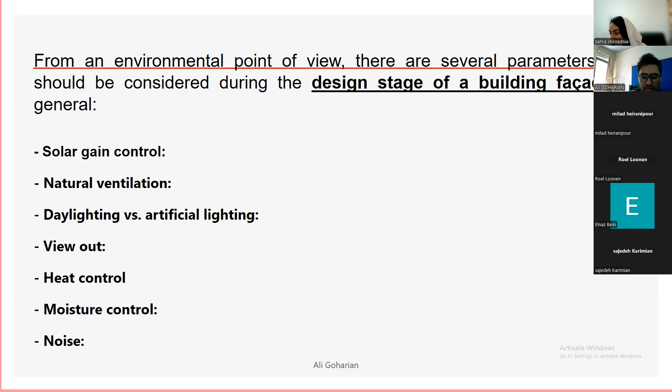Many studies have been conducted in the field of energy efficiency related to dynamic shading, dynamic facades, and shading facades. And there is a bad thing, I think, here. If you want to study adaptive facades, the terminology and classification, because of the many studies in this field, is confusing. For example, we have a lot of different kinds of adaptive facades, such as active facade, passive facade, biomimetic facade, kinetic facade, intelligent, interactive, movable, responsive, smart, and switchable.

However, Amir Tabadkani and other colleagues tried to classify and categorize the different kinds of adaptive facade in terms of typology, but I think there is ambiguity and it's very vague, and you have to avoid getting stuck on terminology and classification. According to studies, they are important if you want to do the research, but it's very confusing, and it's very obvious for any professionals.

First of all, I want to separate adaptive facade into two major parts. Actually, we have two classes: the conventional class and the non-conventional class. Recognizing the non-conventional class is a little bit hard and sophisticated, but if you know the conventional class, you can distinguish the other types of adaptive facade. For example, louver shades, Venetian blinds and roller shades are included in the conventional class, and the others are included in the non-conventional class.

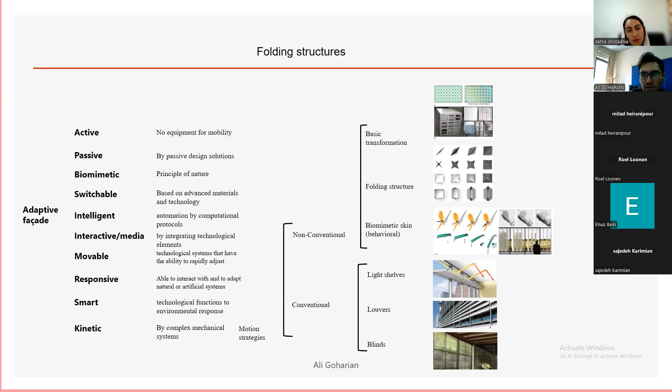For example, we have active facade or passive facade. Double skin facade is a kind of dynamic adaptive facade. However, there is no object that moves physically, and everything is fixed. But actually, it's a kind of adaptive facade.

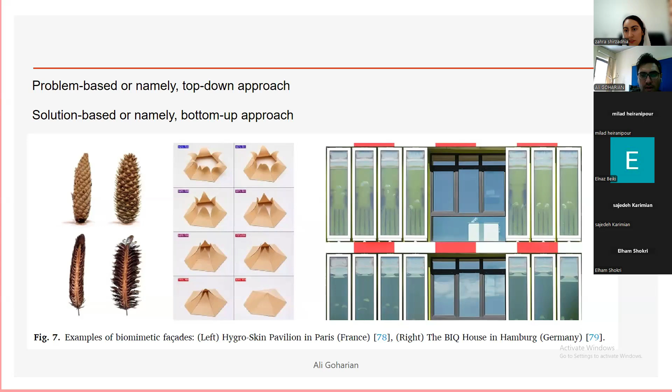And the biomimetic approach in adaptive facade is very recommended, I think, because it's very popular in material science. For example, the BIQ house in Germany has been conducted with algae to reduce and control the risk of glare and excessive incident radiation into a space. This type is very popular, especially in research.

And this is a kinetic facade. A good example of kinetic facade is Al Bahar Tower, and also the Arab World Institute in Paris is one of the most famous kinetic adaptive facades. Usually kinetic adaptive facade considers the indoor environment and tries to control indoor conditions in terms of thermal comfort, visual comfort, and reducing cooling load. Most of the time it is used for dry and hot areas.

Intelligent facade is responsible for initial functions, and we also have smart facade, such as phase change material and thermo bimetal as shape memory, and these are very popular, I think, in research. However, in terms of cost, it is very expensive, and it is not available everywhere. I remember I tried to prepare some materials in the field of thermo bimetal as a shape memory, but I failed, because it was not available in Iran, especially from abroad. I know this is very expensive.

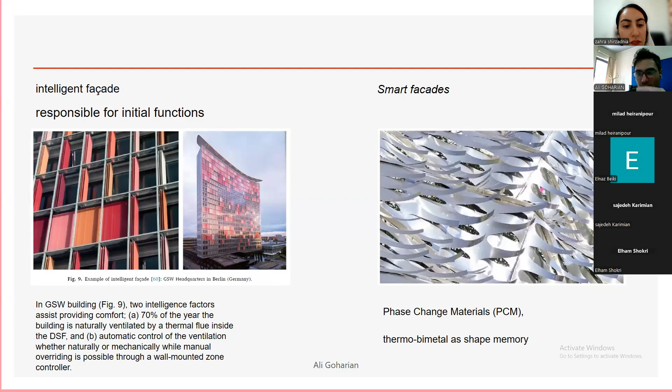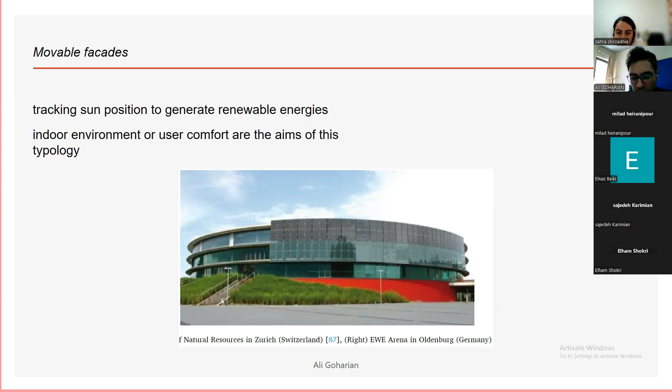Interactive or media facade is mostly used for aesthetic issues, and this is not our focus in this workshop. Movable facade usually tries to trace the sun position to generate renewable energy, and most of the time it disregards the indoor situation, because it focuses on gaining solar radiation to generate as much electricity as possible.

In terms of motion strategy, we have three major parts. First, basic transformation, which is very conventional and common for non-conventional adaptive facade in terms of motion strategy. A more advanced motion strategy is folding structure. As you can see, it is used for Al-Bahar Tower. It's a little bit sophisticated in terms of motion strategy and movement mechanism.

Biomimetic skin is also one of the motion strategies. According to the research, biomimetic skin is very popular, because much research has been conducted in this field, since it's one of the main interdisciplinary studies for dynamic adaptive facade and shading, because of the movement you can find in nature.

However, in terms of physical characteristics, the kinetic adaptive facade is one of the most multidisciplinary topics in the field of mechatronics. Our focus in this workshop does not include the elements of kinetic facade, because it is a little bit complicated. For example, the sensor of an adaptive facade gains the data, then sends the data to the processor, and then the processor commands the actuator to perform the physical action.

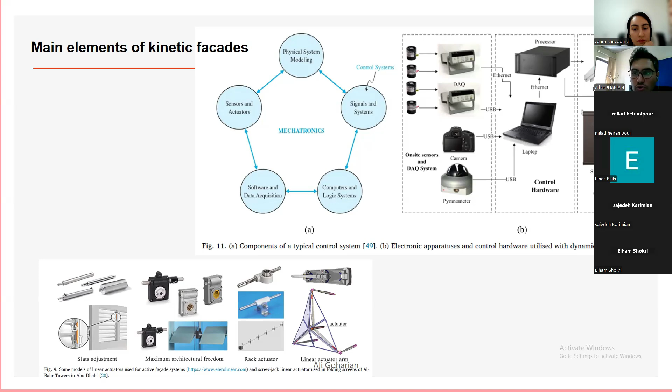And actually EMS is only for conventional adaptive facades, and you cannot use it for non-conventional facades. However, some studies have been conducted in this field, but they are a little bit sophisticated, and they try to use some coding or additional plugins to link some software to each other.

And regarding performance assessment of adaptive facades, the most important assessments are thermal comfort, daylight level, glare, view out, reducing lighting, and energy load. And there are three major approaches to the dynamic adaptive facade. The first is measurement, doing experiments or mock-ups, but it is very time consuming and most of the time very expensive. And it's not very popular, especially, for example, in Iran, because of the cost.

And the second approach is numerical calculation and estimation. We have many studies in the field of numerical calculation for estimating the dynamic adaptive facade. However, it is not popular for architects and designers because of complexity. And building performance simulation is very popular, and we, as architects and designers, usually prefer to approach the dynamic adaptive facade through building performance simulation, because simulation is available everywhere, it is not time consuming, and it's easier than the other approaches I mentioned.

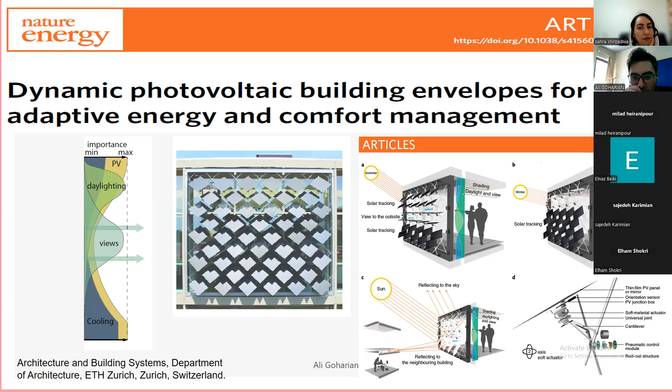On the other hand, each panel has been covered by photovoltaics to generate electricity, and the motion of the adaptive facade is powered by itself, I mean, by renewable energy, and this is very valuable, I think. And also, Morteza Hosseini, regarding architectural concept, published some valuable papers, and regarding ideation, these are very important.

And in this workshop, we're gonna do the model respecting sun position and occupants or indoor environment. These are very valuable papers, and you can read them if you are interested in developing interactive kinetic facades in terms of assessment and architectural concept, because these papers are a little bit easier than, for example, doing research in the field of controlling strategies. They are very intelligent, but they are easier.

And in this workshop, I have to emphasize three tips. In this workshop, our main aim is not to instruct the modeling of dynamic shadings or facades. In fact, our main goal is the type of approach through performance-based analysis to reach a movement mechanism for the dynamic adaptive facade. This type will consist of many hexagonal apertures with panels to open and close fully. And we try to respect both indoor and outdoor environment.

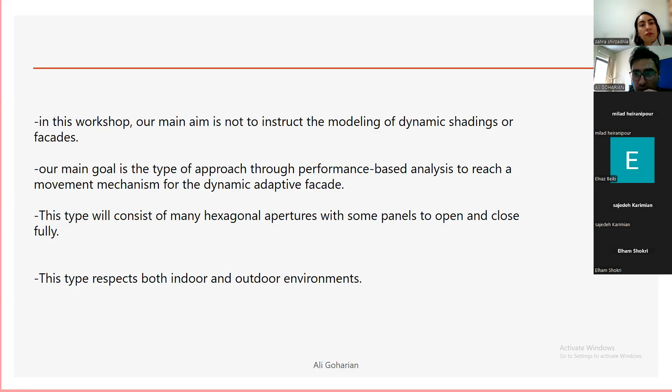And we wanna create a model like a shoebox, and our adaptive facade will be applied on the sun-facing wall. I mean the facade is exactly facing the sun, and this facade consists of many apertures that have panels to open and close to allow incident light to pass indoors regarding indoor conditions, such as thermal comfort, daylight efficiency, visual comfort, and view out, with famous indices.

And before starting with Grasshopper, I have to mention these three important things. The kinetic facade follows an interactive adaptive logic in three steps for improving visual comfort and daylight performance for our model. First, making a user field of vision line between the sun position and occupant position

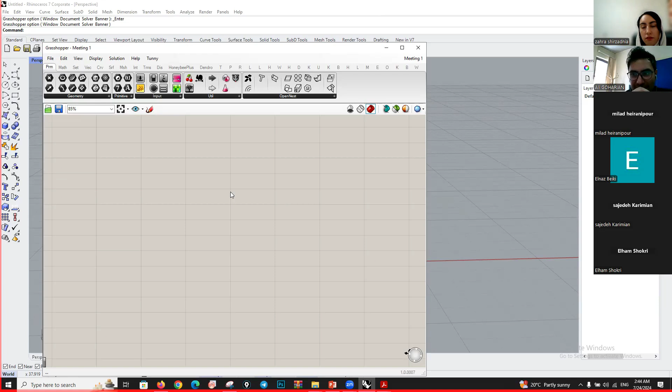Okay, let's get started. Okay, as I told you, our facade consists of several apertures, like hexagonal apertures. I prefer to use hexagonal apertures, but feel free if you want. You can, for example, use a circle shape for this. For this, I'm gonna call a polygon component.

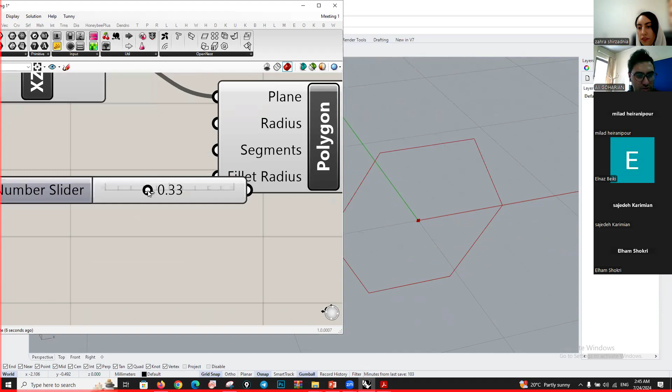And after that, I have to change its plane to XZ plane. And by radius, you can control its radius, for example. And by this input segment, you can control the number of segments that you want. For example, 6 segments, it's okay. And I'm gonna fix this location. For this, I'm gonna use the move in X direction. For example, it's okay to fix in a specific coordinate, and also in Z direction.

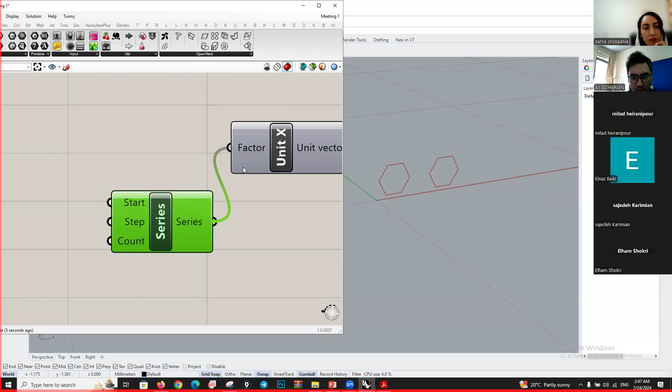Okay, I should turn off this. And actually, I'm gonna produce this in horizontal direction by move again in X direction. Instead of integer, I'm gonna use the series component. And by this component, you can control the count of apertures and the step of that, I mean, the distance between each aperture, for example, 12. Okay, and for a step. Okay.

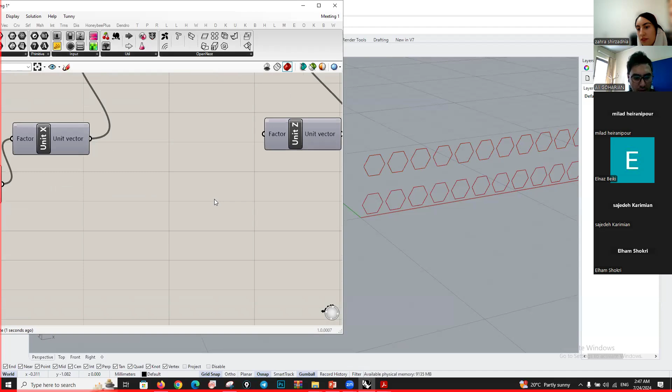And in Z direction, again, I wanna generate these apertures in Z direction. And again, I use the series component, but it must be grafted. Graft, okay. And the count, for example, 5 for count, and a step.

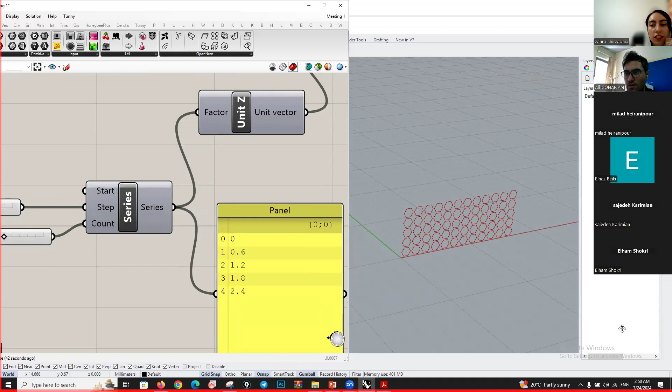Ghazala asked if you could please explain more, because she's not familiar with Grasshopper. You mean the name of each component? How we can show it? This is another question people ask me, to please explain more about the modeling. What are you doing right now? Yes, actually, okay, I think it's very obvious.

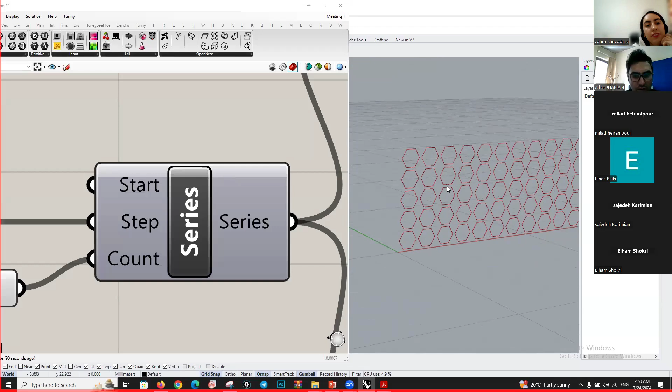We're gonna create a model. First of all, we have to create the aperture according to size and location. I think everything is clear because it's very simple. It's a simple facade, and after that we're gonna add some details for producing the dynamic facade.

After that, for each hexagonal shape, I have to make the shape smaller using scale, and by area, I can find the center of each aperture. For example, by factor you can increase or decrease the size - 0.8 is okay.

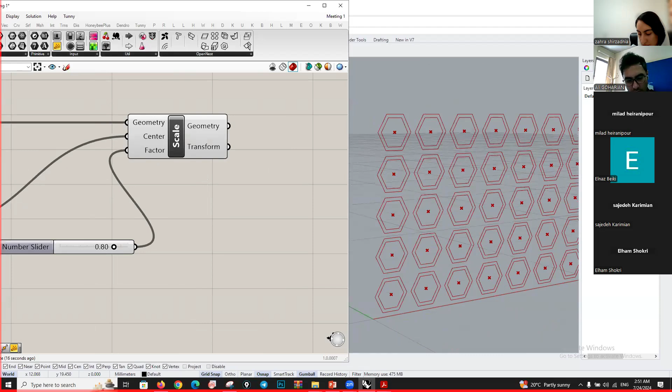After that, the smaller shape must be pushed a little bit back, because I want to create the frame for each aperture. For this I use the move component in the right direction - 50 centimeters is okay for that. And I'm gonna turn off this.

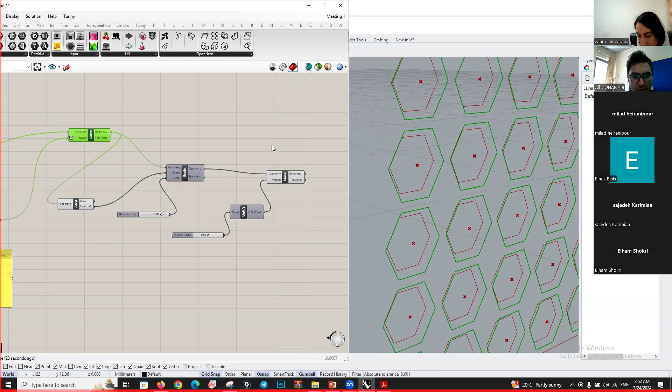Actually, these curves have been created. In the next step, they will loft together to create the frame. For this only I have to use the ruled surface, for example, curve A and curve B. I think it's very simple, and all frames for all apertures have actually been created right now.

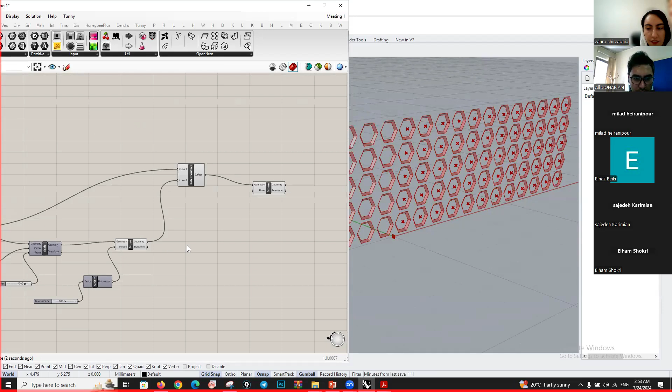And also, I'm gonna mirror this frame to complete all frames for all apertures. By mirror, this surface must be input to geometry, and the plane is this curve. And all frame has been completed.

Completed. And in the next step - please let me take my pen - in the next step, actually, I want to create a panel like a triangle panel, for example, into the edge aperture, like this.

Actually, we have 6 panels so that they can open and close - a fully closed state and a fully open state. For this purpose, actually, I have to extract these points in my algorithm, and after that I should create the polyline between 3 points.

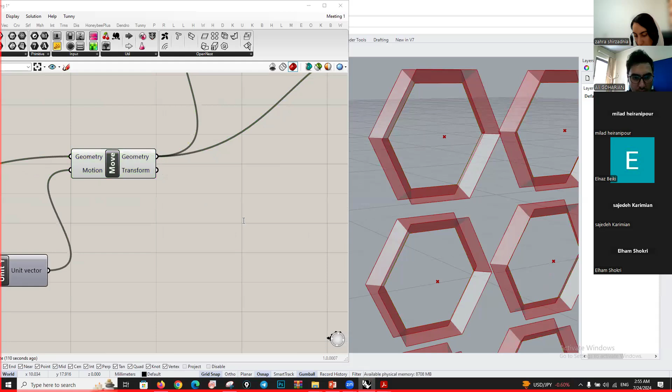For this purpose, actually, I call the explode component, and this curve must be input, and all vertex and segment have actually been extracted right now.

And I can call the vertex by list item. This is a list item, and you can call any object that you want by calling the index. For example, by this panel, for example, 0 and 1 index I want, and it must be multi-line data.

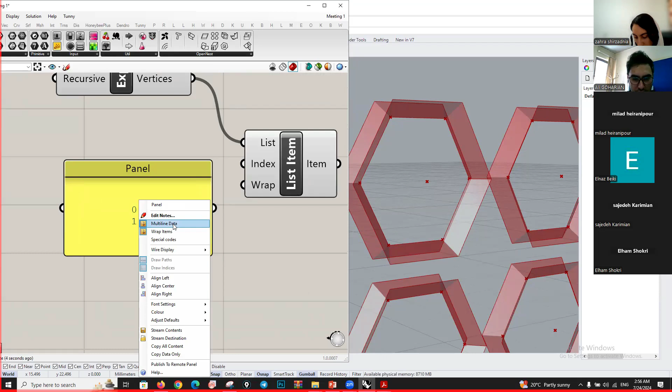And select these 2 points. After selecting the central point, actually, I can create a polyline curve. For this purpose, only I should get the area for extracting the central point using this component.

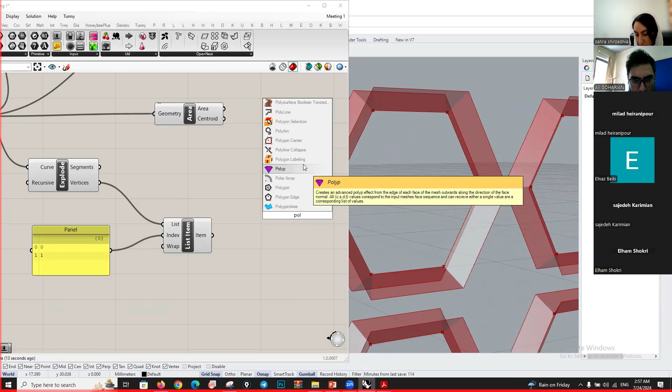And in this algorithm, I have to use the polyline. Only you have to input these points and the central point to this. By keeping shift, you can input the central point, but I think something is wrong. Okay.

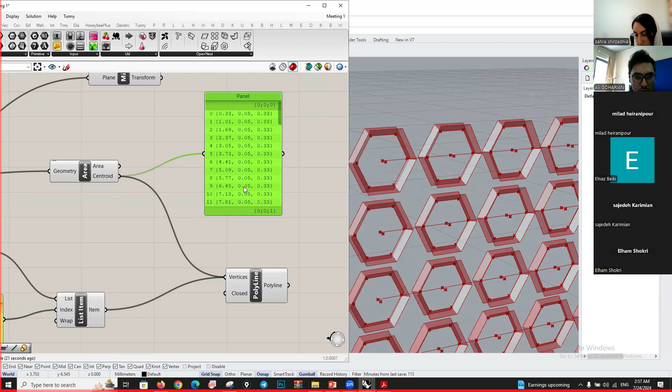I got it. Actually, the cluster of points has been ordered in such a way, and it must be created in a group of six, because we have six segments actually - no, I'm wrong, excuse me. I only need to change it to graft, because they must be separated.

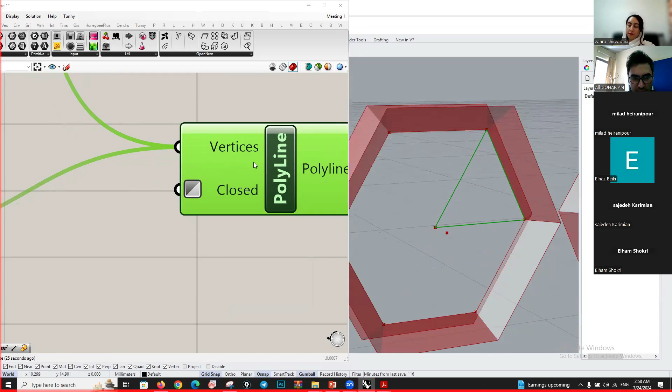After that, for the polyline component, only you have to switch on closed mode to complete this curve as a triangle curve, as you can see. After that, in the next step, it's very easy - only you have to duplicate this algorithm.

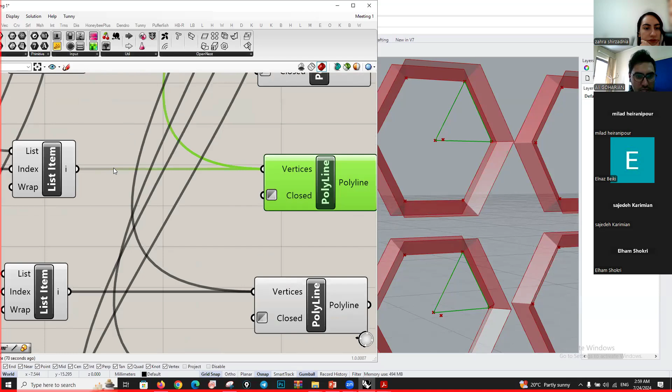For example, we will have six panels, so I have to duplicate this six times: 1, 2, 3, 4, 5, and 6. After that, only I have to change its indexes to select another triangle. As you can see, for example, here we have 0 and 1 as an index - only I have to change it to 1 and 2 as an index. As you can see, the next polyline has been created, as it's clear.

And also for this, 2 and 3, and 3 and 4, 4 and 5, and last is 5 and 6. Okay, as it's clear, all triangle panels into the edge aperture have actually been created and made.

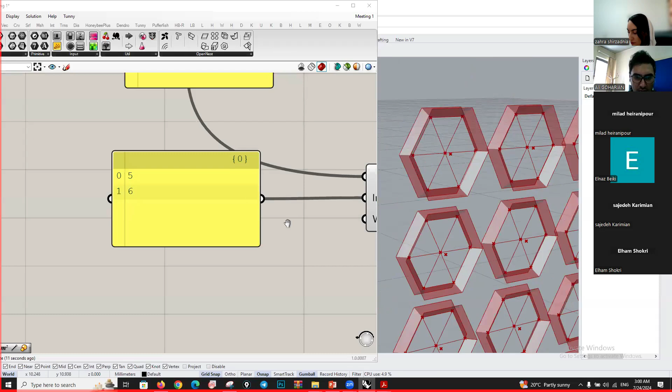And in the next step, I want to rotate the edge triangle panel. For this, only I have to use the center for each segment.

I have to select a point as a center of each panel, and after that, for determining axis, I have to use a segment for that, and it will be repeated for other segments. For this, I have to use rotation.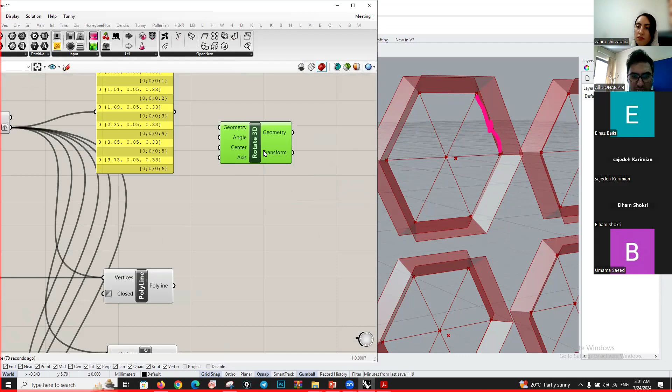As you can see, we have a lot of components related to rotation, but I'm gonna use rotate 3D, it's very okay for such a model. For example, you can input the geometry center for each panel and the axis for each panel as well, and after that determine the angle for rotating your objects.

For this, I have to input all the geometry that I created by keeping the shift. You can keep the shift button, and you can input your object to geometry.

In the next step, you have to select the center for each panel, because I want the panels to actually open and close in this direction. For this, I have to use this H center.

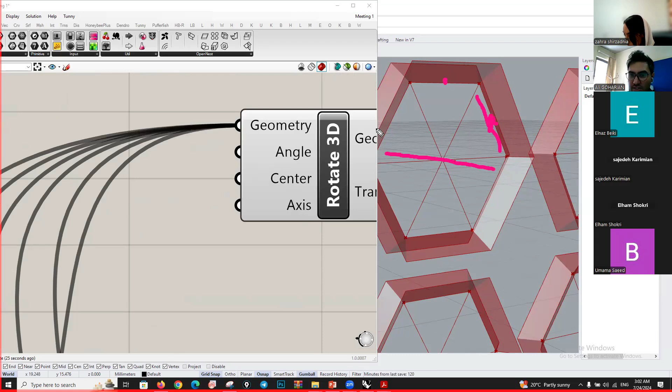Only I have to use a middle component for this, curve middle. By this component, you can input the segment and curve, and after that extract the middle in the center of each segment exactly.

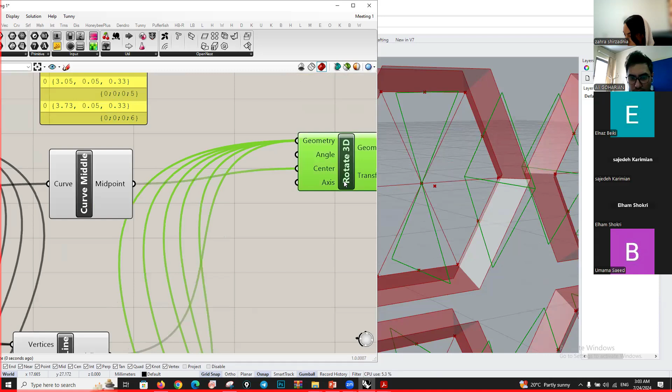As you can see, all central points on each segment have been done, and I can input them to the center. In the next step, I have to input the axes for this.

Only I should call a list item for selecting my list, and if I check this, all segments have been separated, and it is not matched with this because I should create a cluster in a group of 6.

For this I only have to call an index from 0 to 5 to reach 6 segments. I have to input 0, 1, 2, 3, 4, 5, and it must be multi-line data.

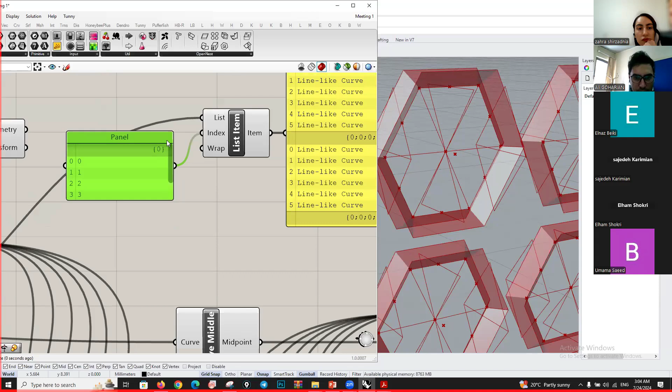As you can see, the cluster has been created actually in groups of 6, and you can input it into the axis.

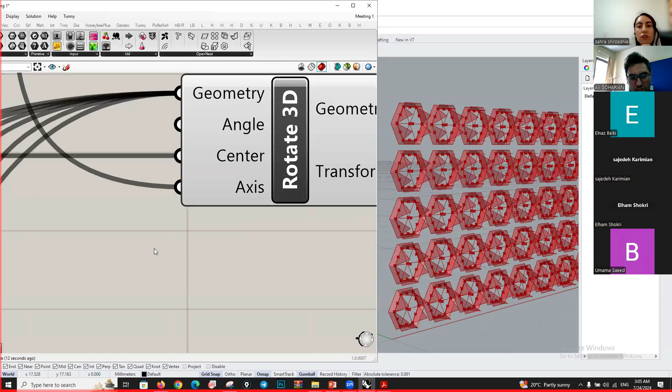To visualize better, please let me use a boundary surface. As it's clear, all triangle shapes have been done right now, and only by this integer can you change the amount of angle.

But it must be changed or shifted to degrees because it's radian. For this I have to change it to degrees mode. As you can see, by this integer you can control the amount of angle for each aperture.

Okay, here I think there is a point. I believe that, as you can see, the whole adaptive dynamic facade has been created and made, but I believe that according to morphology and configuration, it's like a non-conventional facade. In my opinion, according to movement mechanism or motion strategies, it is not conventional, because all apertures can open and close simultaneously, or at the same time.

It means they can control indoor conditions in general. For example, if the sun is emitting directly to this facade, they can act as a fully closed state, and the reduction of cooling load will occur. But on the other hand, daylight efficiency will be decreased, and it is a problem we want to mention. This is one of the most important challenges for dynamic kinetic adaptive facades.

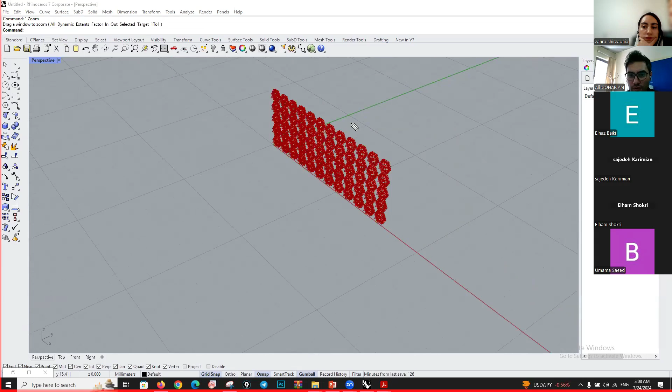For this purpose, we know the position of the sun is different at a desired hour. For example, imagine the sun is located here and facing exactly this facade. Only this part of the facade is exposed into direct sunbeam or direct sun rays.

And this part can allow diffuse light to pass inside, to decrease electricity energy consumption. This is a good solution, and many studies have been done with this idea.

However, in my opinion, they are true, but they are not accurate. We're gonna address this problem in this workshop, and after that, in the next session, we're gonna get the solution for this.

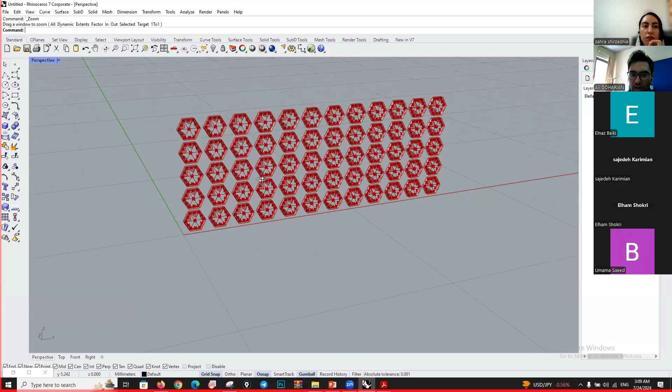As a result, I want to change the movement strategies, or change the movement mechanism for each aperture. For example, I want to cluster each column separately, and they will act differently relative to other columns.

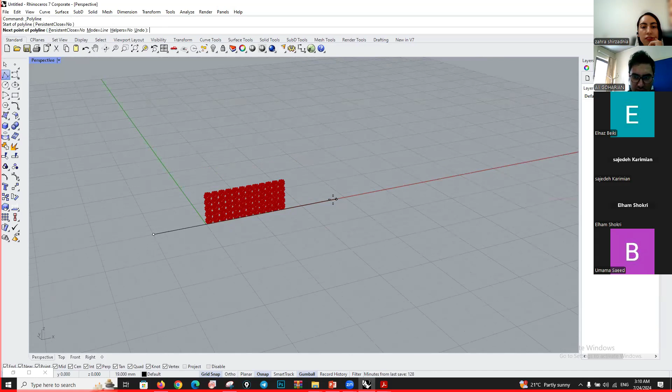For this purpose, please let me visualize for better understanding. I have to use this, it is not important and not directly related to our purpose, only I want to show you. The curve must be inputted in the Grasshopper environment.

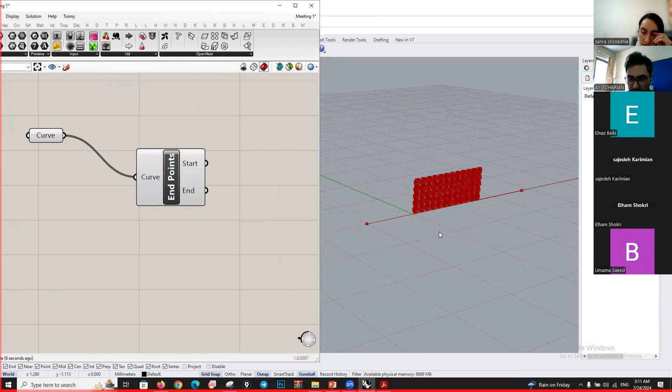I can internalize data and bring this from Rhino. After that, an endpoint component extracts a start and end point for the curve. This is very simple, and there's no need to explain this component.

For this, an arc must be used. This arc SED. You can input the start point and the end point, and you have to determine the direction, for example the Z direction.

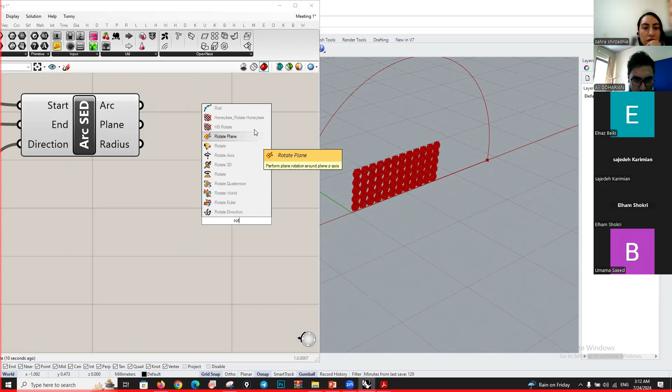The arc has been done, and let me rotate it using this rotate component. The plane can be gained from this curve, and I have to change the angle.

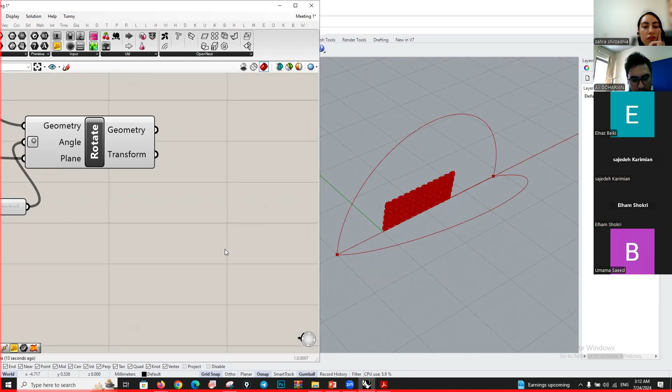After that, I want to produce a point to draw on this curve, and for this I can use Evaluate Curve. By this component, you can determine a point on a curve that you want, and it must be reparameterized because I want to input a number between 0 and 1, not more.

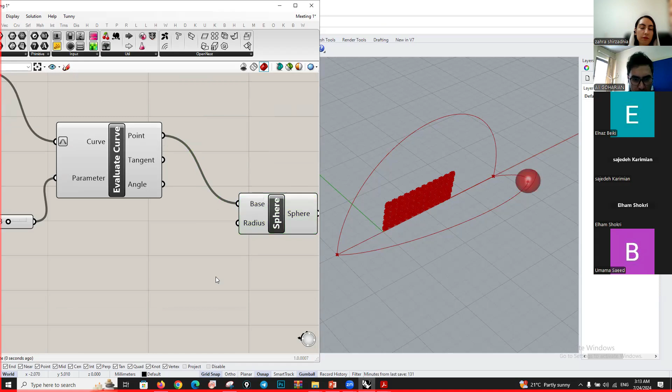For example, as you can see, we have a point that can move across our curve. After that, to visualize better, I can use a sphere for this. My aim was to generate a point, and also we have a point here.

For example, the central point I can get from this curve. It's very easy, I can get the area and extract it from this component.

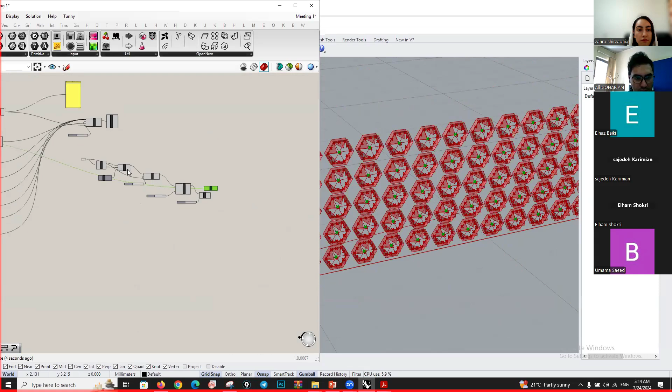Here, for example, we have the central points, or several points, and on the other hand we have a point here. Only by making a distance between this point and these points can I produce the number to input into this angle for my rotation.

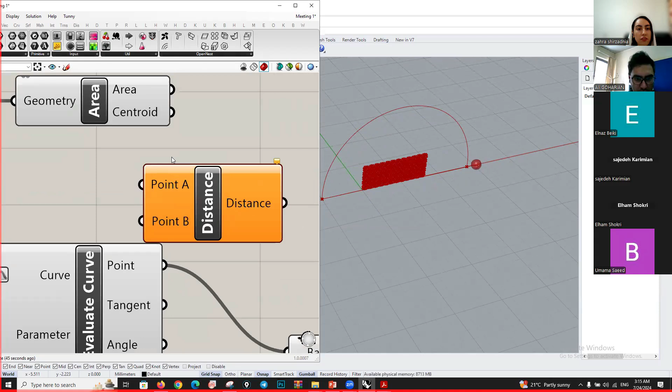For example, I can use the distance between this point and this point. If I check by the panel, I can see that for each row, 12 numbers have been created right now, as angles for my aperture.

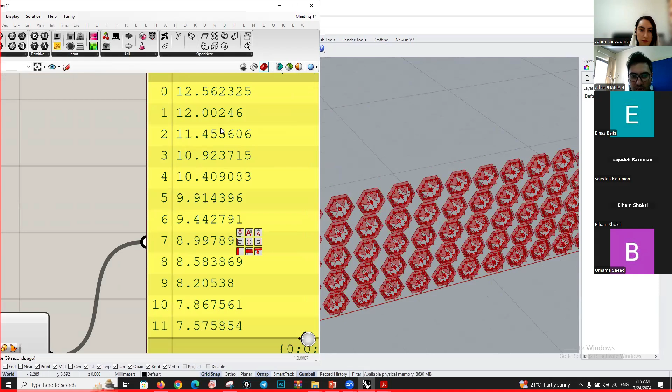But as you can see, they are very little, and I have to increase them to reach my desired angle. For example, the highest angle is 12, and obviously it is not enough, so I have to increase it.

For this, you only have to remap this number using the Remap Numbers component. By this component, you can change the number into your desired domain, and the source must be bound from this and this.

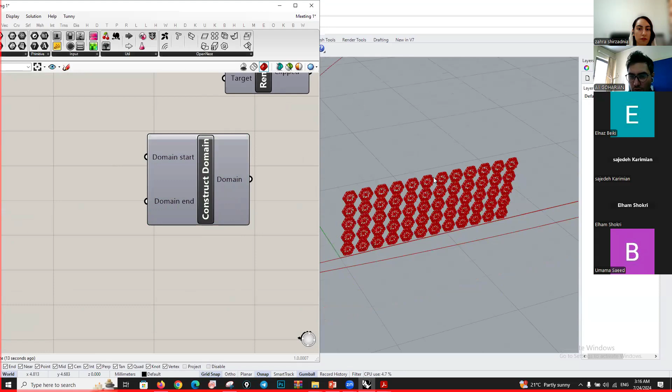For the target, I only have to use Construct Domain. In this case, my aim is to determine the angle, for example the lowest angle and highest angle, for the rotation of these triangles. For instance, 20 degrees as the start, up to 90 degrees. If I connect this domain to the target...

As you can see, my numbers are now divided between 20 degrees and 90 degrees.

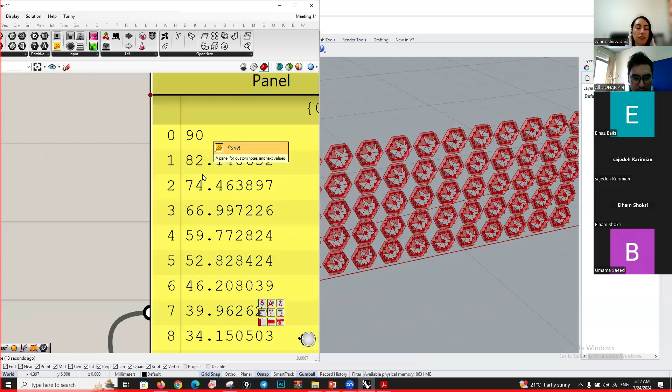Because it must be matched for my geometry, I only have to use Graft. Because the geometry has been assigned for only one column, I have to generate it for 12 columns, as you can see. For example, if I input this... okay, it's clear.

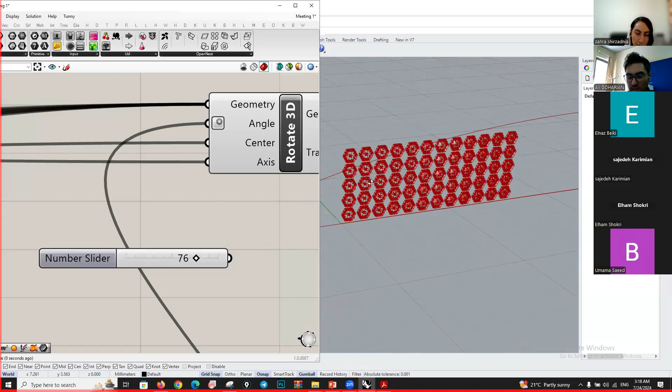For example, by this strategy, many studies have been conducted to control dynamic adaptive facades by sun position - I mean the hour - so the adaptive facade can adapt itself by the time.

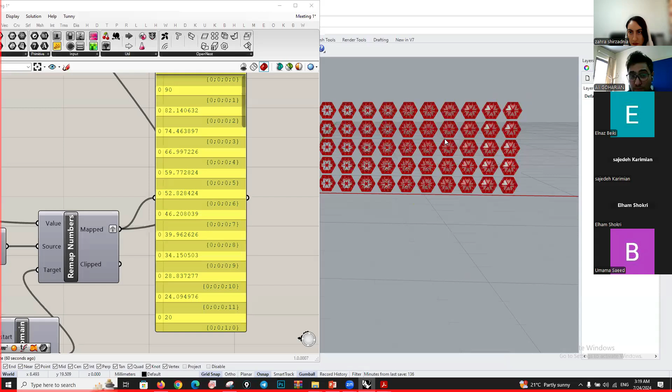But today, I don't want to instruct the Ladybug. In the next session, Zahra will instruct the Ladybug tools to you, but I only want to show you that this problem is very essential, and it is not about accuracy - however, it is interesting for everyone who wants to be professional in this field.

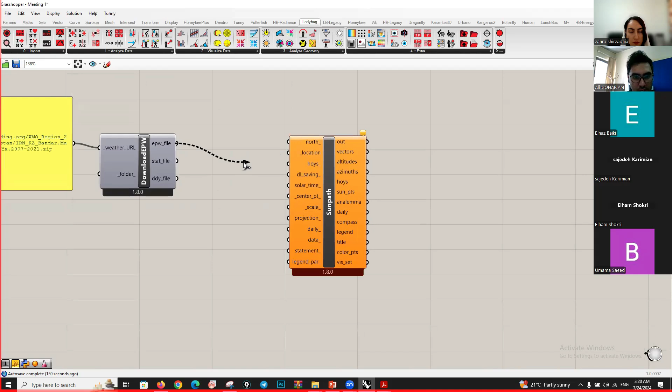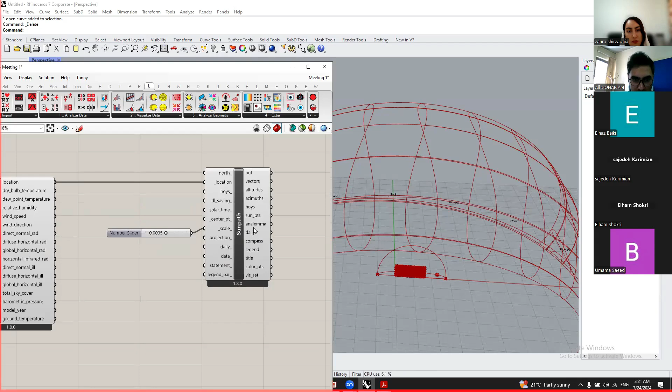And I think yes, it has been made. But it must be smaller by its scale because it's very huge. Yeah, as you can see, it's a SunPath according to the location that is extracted from the EPW file. And for today, actually, I don't want to instruct this, and Zahra will teach you in the next session.

And for determining the sun position, actually, I use the LB analysis period. It's very simple. You can only determine your date. These days are not essential. And the hour, for example, between 9 a.m. to 3 p.m., 9 and 15, per hour.

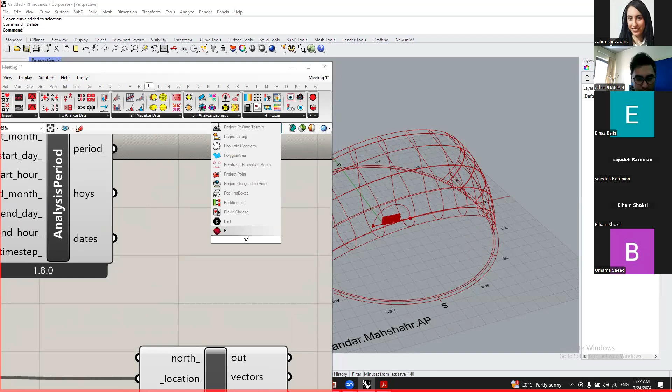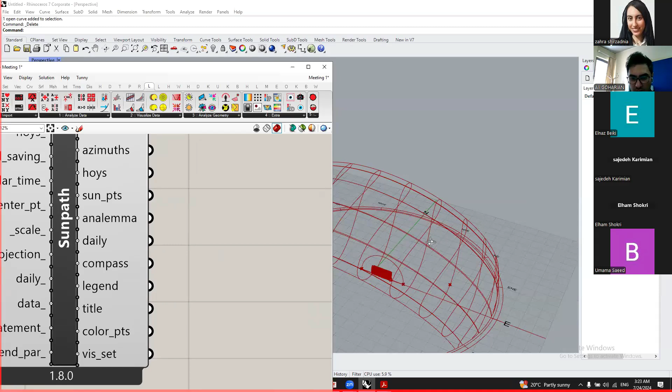If I check it, my aim was to extract the single position for the sun, for example, 3rd March at 9 a.m. And I can input the hour of year output to this input hour of year. And SunPath actually has an essential output like this. I mean, this is a sun position. This is a coordinate that will determine the position of the sun, but in Rhino.

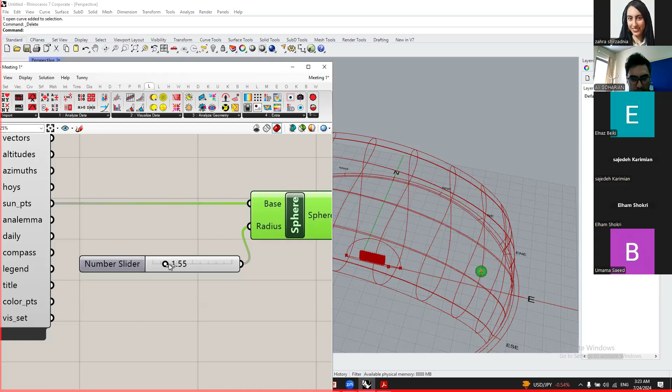For example, if I visualize it, simply it is point. I can input the sun position to this instead of this point actually. I mean here. Okay.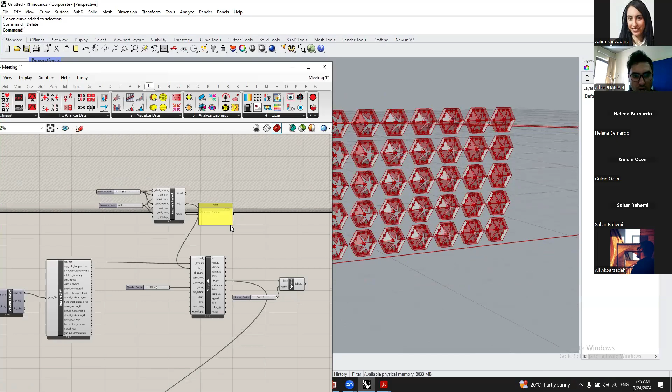But it is not quite accurate, I believe, because, as I told you, many authors try to have some strategy for adaptive facades, but in my opinion, this is not accurate because it depends on the Rhino dimension and the Rhino coordinates. For example, this is a physical coordinate in Rhino, and according to the realistic sun position, it is not true.

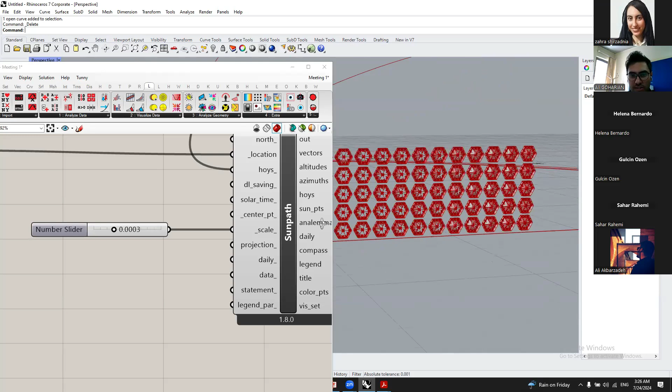If I want to prove it, for example, you can see I change the scale of the sun path, and as you can see, the angle of the apertures, the angle of the panels actually are changing. And it's obvious, it's very funny, I think, and it is not accurate, because when we do research, we want to reach an output as accurate as possible. This is not accurate.

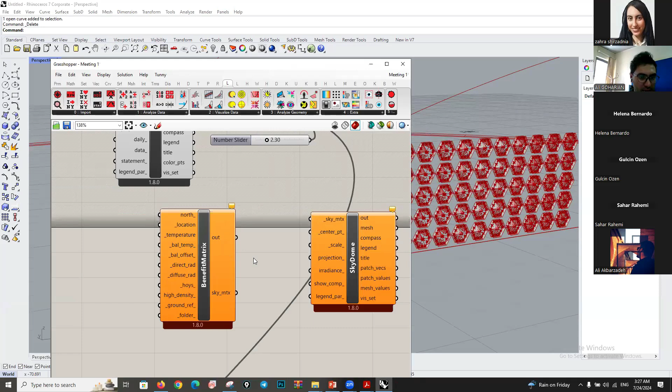Please let me show you more about it by LB Skydome. This is not related to this workshop, only for your knowledge. I want to use this algorithm and LB benefit sky matrix. After that, I have to complete this component with the location, temperature, direct normal radiation, and diffuse normal radiation. And I can get this output to a sky matrix to create it, but the scale must be very

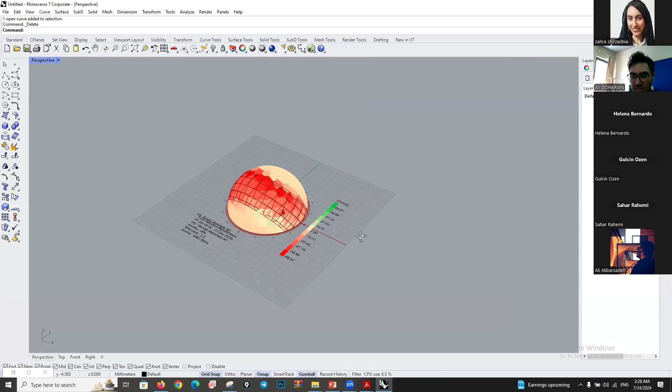Okay, as it's clear, this is a sky dome, and software related to simulation tries to use this principle. In the calculations of many software simulating daylighting or thermal issues, such as EnergyPlus or especially Radiance, they use such a strategy. This technique is simplifying the sky dome into several patches, and it's a simplification.

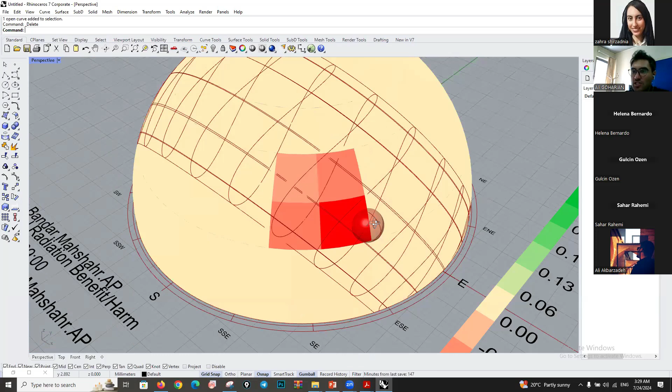If I input this hour to this, you can see there is a problem. I told you many researchers and authors publish many high quality papers with this strategy, but I think it is not right because the sun location they consider is only a point in Rhino or in the software environment, and that does not match this. In daylight simulation and energy calculations, these patches must be considered.

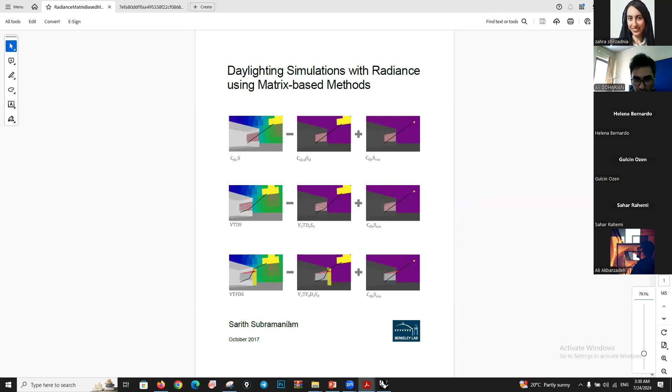If you read this paper, it's highly recommended if you want to dive into daylight simulation techniques in Radiance. I recommend you read this paper because it's very important, and the authors tried to introduce the techniques related to daylight simulation as much as possible and in a professional way.

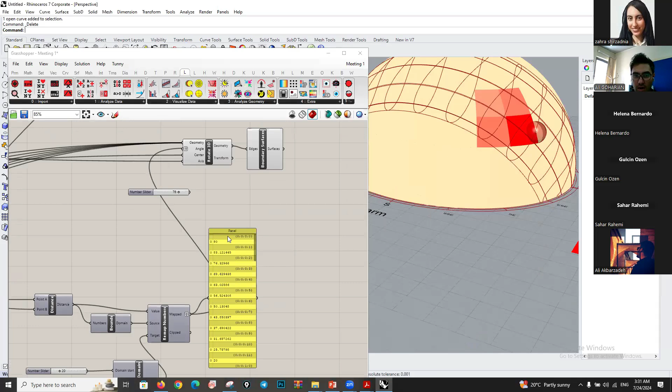But by producing this number, you can adapt. Please let me turn off this. By this number, you can adapt the best state related to sun position. In this session we address this problem, and in the next session we will get the solution, and definitely it is optimization. However, there is no study related to this strategy because it's part of my thesis.

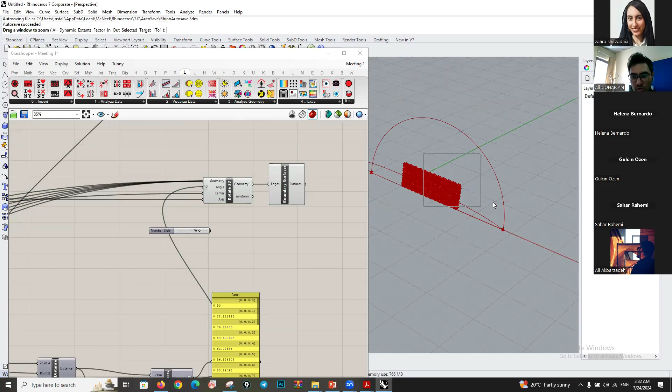And in the next session, after Zahra's instructions, we will get the solution for this after simulating the daylight performance and energy issues, and also view quality. We will work on this problem. For example, how we can extract the optimal state exactly, or the method of calculation for daylight simulation actually.

Okay, I think for this session it's enough, and in the next session Zahra will teach you how you can simulate the energy issues and how you can create the thermal zone and the radiance zone for estimating the daylight indices and thermal comfort indices as well.

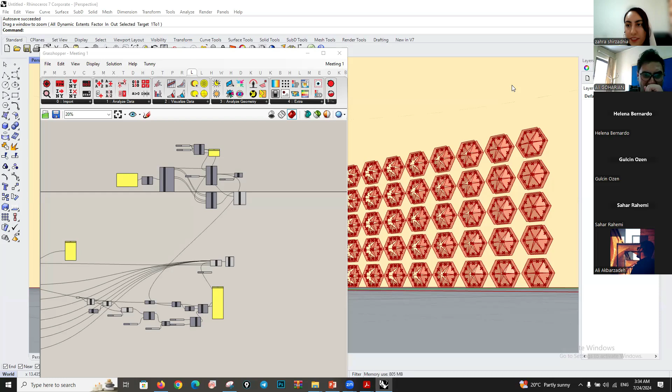If you please let me open the chat. Okay, guys, if you have any question, you can write it down in the chat box. And Zahra, if you have any opinion, you can share it. Because in the next session, you have to teach the simulation workflow. Thank you. Let me. Okay. Now, could you please turn up your share? I want to share the PowerPoint, but it's not necessary for me.

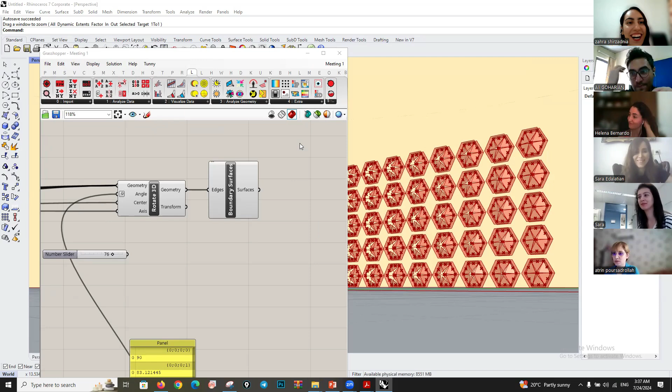I don't know, is it necessary to ask the guys to open their camera and take another shot or not? Ali. There is no question. Nothing else. Some people want to take a shot again. Thank you. Okay. If you close your sharing window, we can see all of the people. Ali, please close your sharing window. Okay. How can we stop? I think at the top of your window there is stop sharing. I think you can control it from your panel. No, I cannot. Now you're loading your whiteboard. Okay. It's okay. Anybody want to open your camera? Okay. Now we can have a conversation.